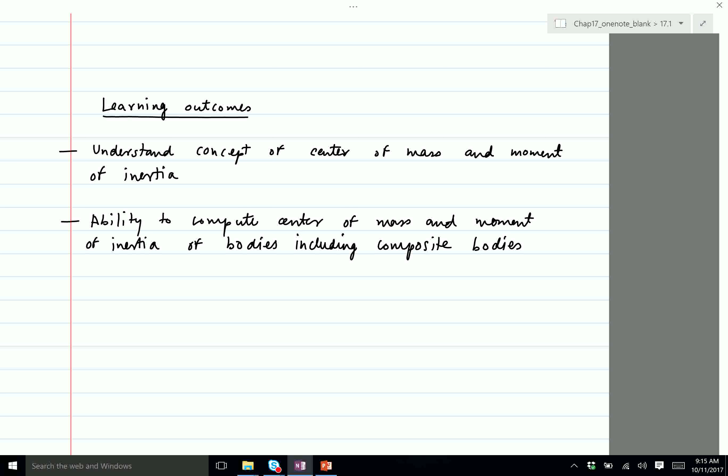This will set you up to do rigid body motion. This is not rigid body motion yet, not the dynamics yet, but just the basics to get to applying F equals ma when things are rotating.

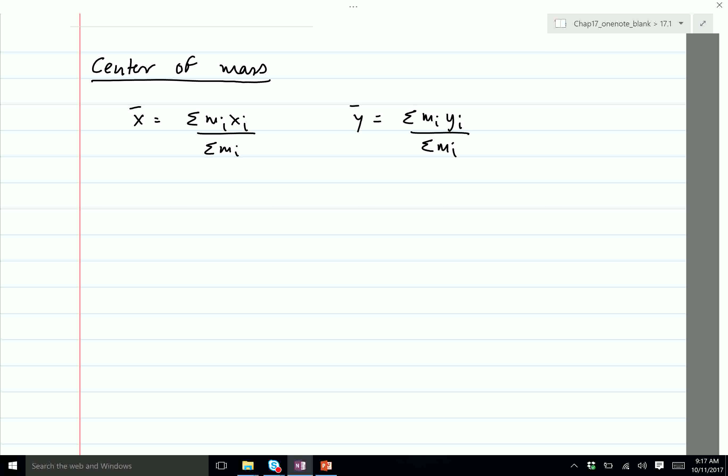So what do I mean by this? Well, this applies to either a simple shape like a circle, which would have a different center of mass than a rectangle, or a sphere, and so on. We'll be giving you pretty much the center of mass of simple shapes. For example, for a circle, it's in the middle, assuming the mass distribution is uniform. For a rectangle, it's again in the middle. What we are interested in here is trying to find the center of mass of composite bodies like such.

So if you're given a geometry which consists of two squares, and I ask you to find the center of mass of the composite bodies, where we know the center of mass of this square is right in the middle, and the center of mass of this one is right in the middle, but where is the center of mass of this composite body? What will help you do that is those formulas.

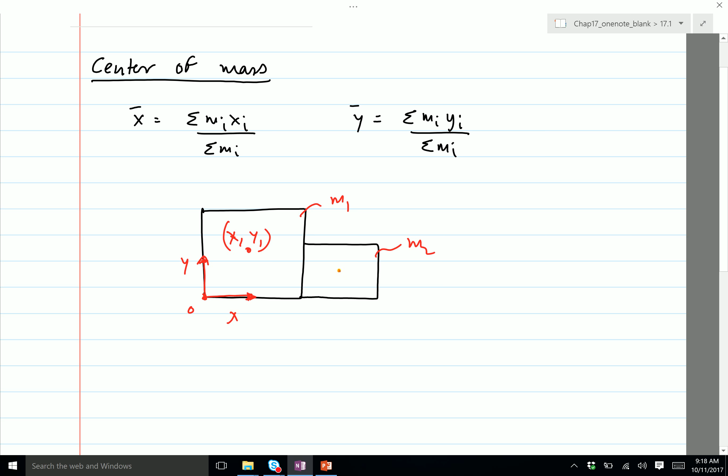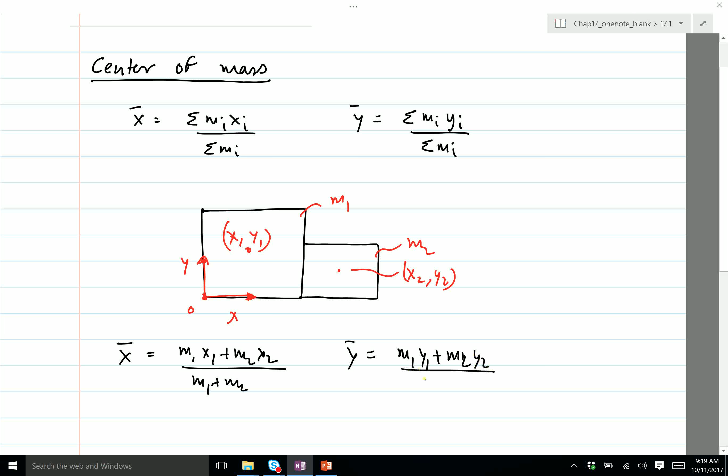So if this is m1, this is m2, this is x1, y1, where x1, y1 is the center of mass defined relative to the origin which I've shown there, and then x2, y2 is this. In order to find the center of mass, you just apply: x bar is equal to m1 x1 plus m2 x2, divided by m1 plus m2, and y bar is m1 y1 plus m2 y2, divided by m1 plus m2.

X1 and y1 is the center of mass. So for example, if I told you that the sides of this square are 1 and 1, then x1 would be half along the x-axis, and y1 would be half along the y-axis. Let me make it clear this way. This is y1, this is x1.

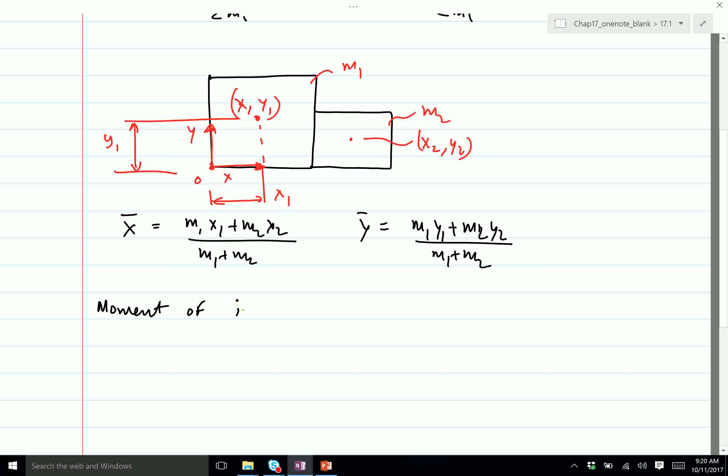Is x2 from the origin, or is it from the center of the second block? Good question. It is from the origin.

This is x2. This is y2.

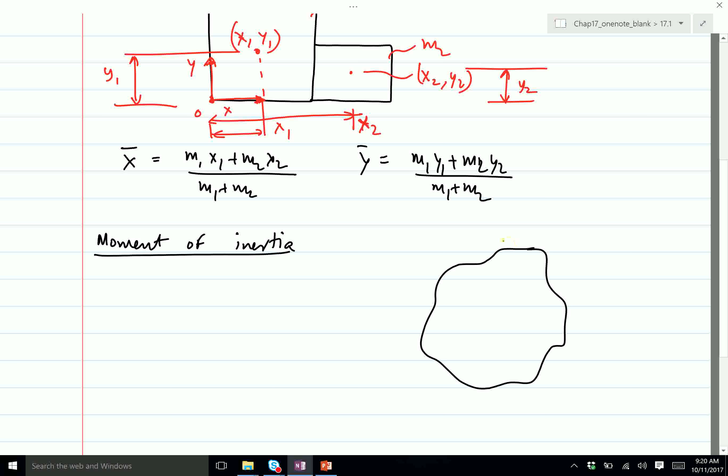So the moment of inertia is something which I believe you've learned how to compute in calculus. What it physically means is, let me just write the formula. If you want to find the inertia of a body, you need to take a small element at a distance r from the axis along which it rotates, or the axis for which you are finding the inertia, multiply by the mass, and take the integral over the mass. I'm not expecting you to do an integral. It boils down to, depending on the body, if it's a plane body, a double integral; if it's a three-dimensional body, a triple integral. Not expecting you to know that.

What inertia physically is, is the tendency of a body to oppose rotary motion. Just like mass is the tendency of a body to resist linear motion, the analogous part in the rotational world is the moment of inertia.

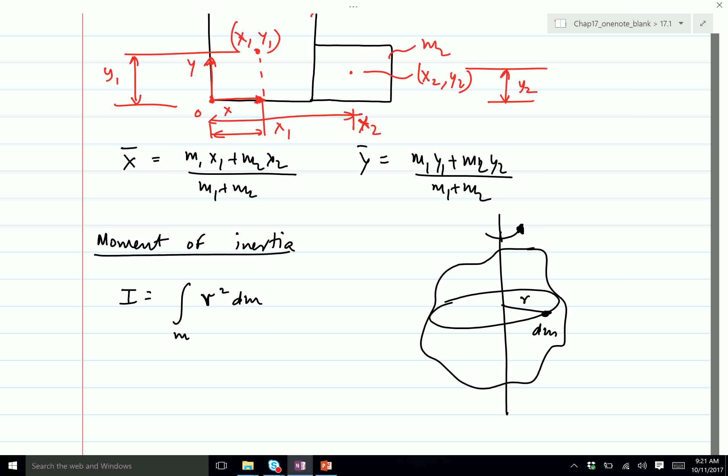So we will be giving you the inertias. We are not expecting you to remember them. A few inertias which are important, which basically come again and again in the class, are the inertia for a cylinder about, by the way, the inertia is defined about an axis. So in this case, for example, there is the axis z, which is along the length of the cylinder, and x and y is along the circle. Most of the time, Iz is half mr square, and Ix, Iy is different.

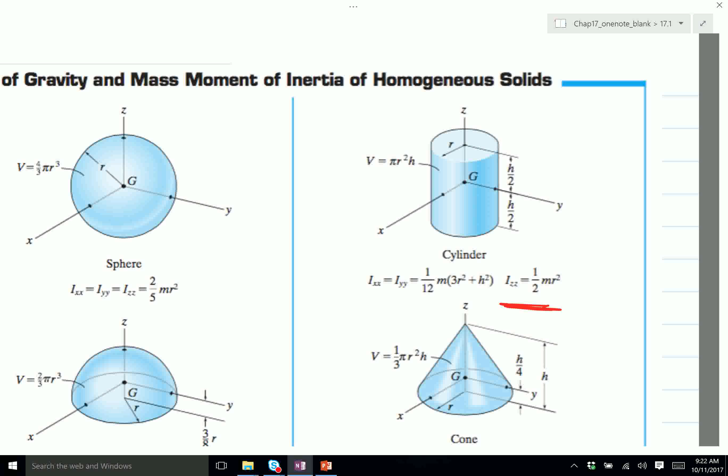So most of the time, we'll be looking at cylinders which roll, which means that we need to find Iz, and that's one formula which we'll be using again and again. The other one which will be coming again and again is this one, and then the ring is important, and then slender rod is important when we talk about pendulums. This is important.

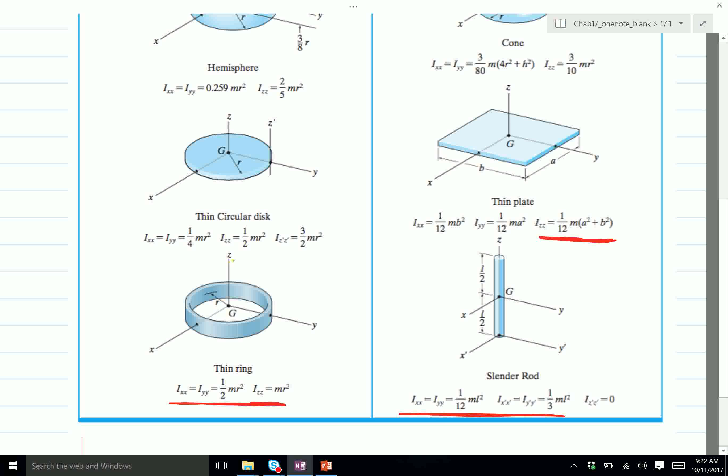I think disc, yeah, sometimes disc is the same as the cylinder. That's important. Nevertheless, you do not have to remember, as I said, we will not give you this table in the formula sheet, but for the specific problem, we will give you the formula, so don't worry about it. At the most, what you might have to do is we might give you Ix, Iy, and Iz, and you might have to figure out which of those inertias you have to use to solve the problem.

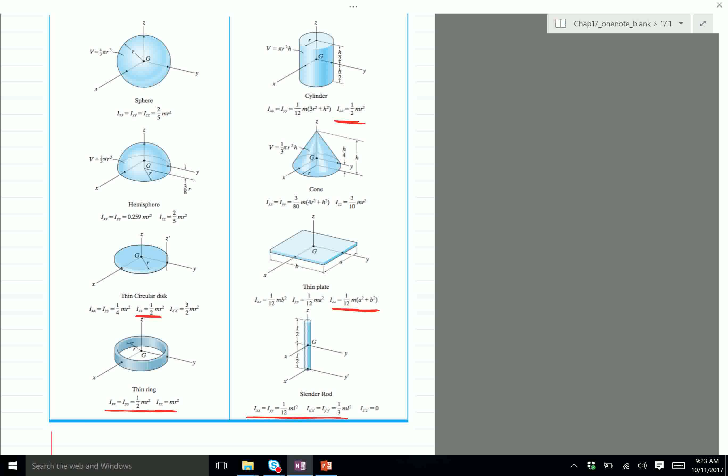Okay, the last thing I want to say before I go to problems is what is known as the parallel axis theorem, and this is two things: parallel axis theorem and radius of gyration. So parallel axis theorem is a way of computing the inertia about a parallel axis, and I'll tell you what I mean by that. Parallel axis theorem.

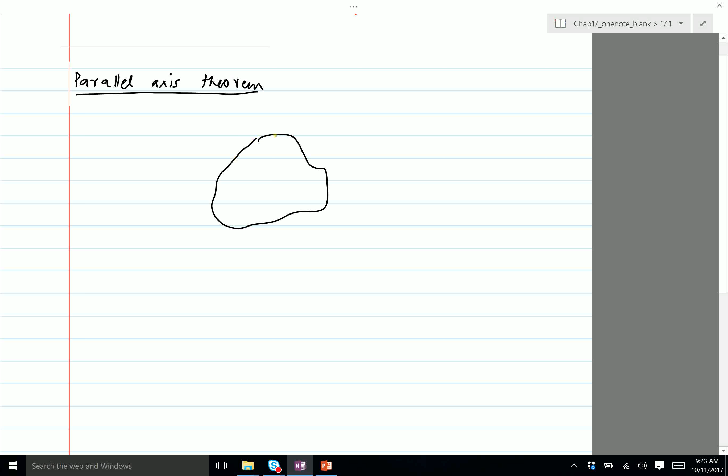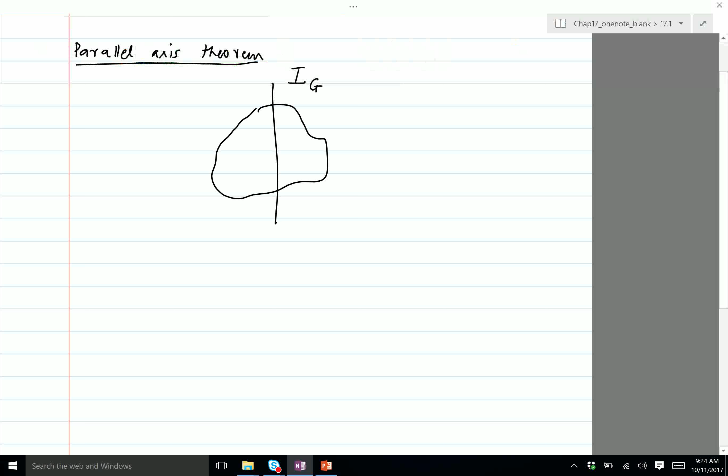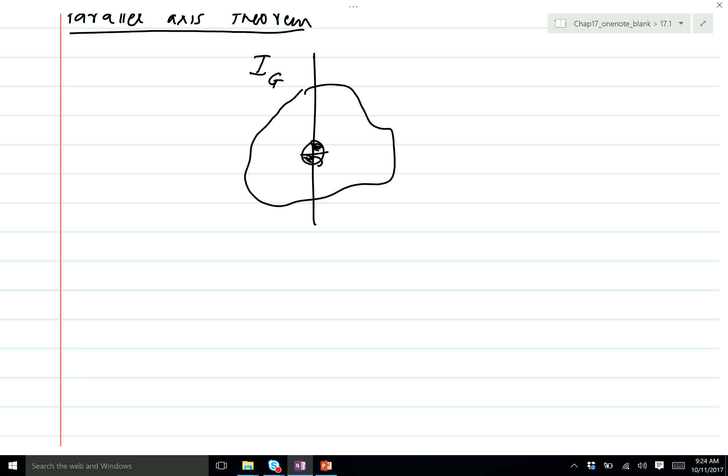So given a rigid body and you know the inertia about the center of mass, center of mass is usually denoted this way. So for example, for a cylinder about Iz, the center of mass is mass times length square, mr square divided by 2.

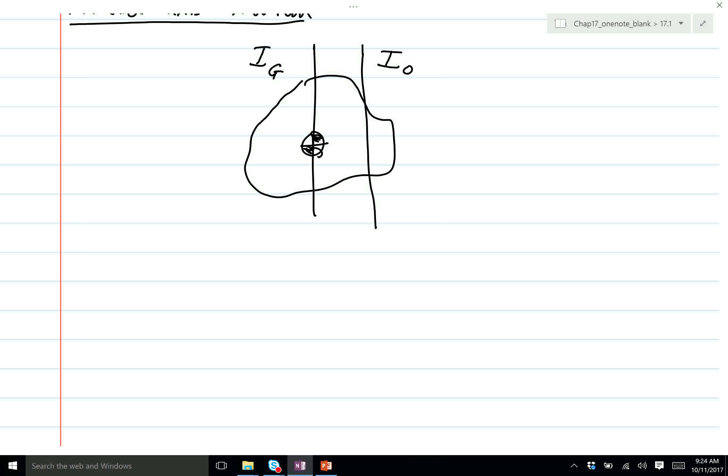You want to know the inertia about a different axis. Let's call that IO. So the table will give you Ig. The question is, how do you find IO? There's a simple formula: IO is Ig plus mass times distance squared. The distance is the distance from the axis which you are trying to find the inertia about, which in this case is the right axis. So that's the d, the distance between the two axes, and you just take the mass of the body and multiply with d squared.

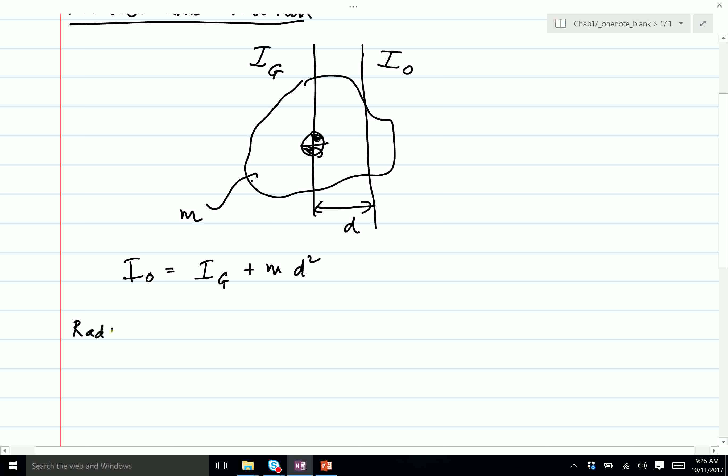So I'll give you Ig from the table, you'll get Ig. You need to find IO. This is how you do it. The last thing before we get to problems is radius of gyration.

So what you're given is, typically in a problem, the radius of gyration is so and so. So if you're given the radius of gyration, you only have to take the mass and multiply with k square, which is the radius of gyration, to get the inertia. You do not have to look at the table. So what is the radius of gyration? It is the, yeah, so I should write k here.

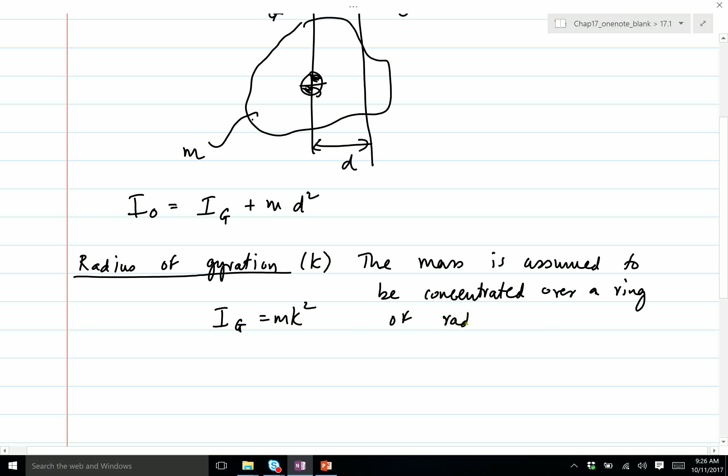The mass is assumed to be concentrated over a ring of radius k. So what it means is, if you're given a random body like this, and it has its own IG, given to you, you try to take a rigid body which has a shape, it could be a funky shape, or it could be a cylinder, whatever you have, and try to think of reducing that figure into a ring of radius k. For calculation purposes, you take this body and reduce it to a ring of radius k. That's the radius of gyration.

It's a way of taking any shape you have and reducing it to a ring of radius k. So how do you get k? Well, you know Ig, it's given to you, it could be from the table or something you compute. Then you just find k equals Ig divided by m, and then you take the square root. This comes from this formula.

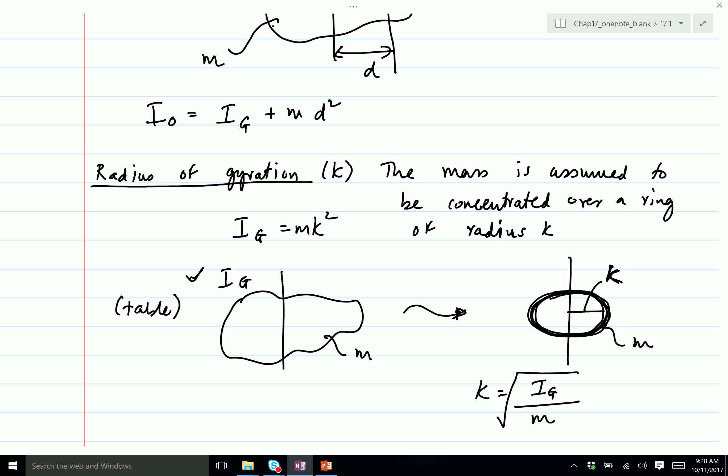So we will not tell you to find k, well, we might tell you to find k. Sometimes we'll give you Ig and you will find k, or we'll give you k and you'll have to find Ig. If it's still not clear, I won't be doing a problem on this, but it will be clear once you solve problems. You'll be given k, you have to find Ig. That's all, it's as simple as that. You do not have to look to any table. So let's get started with problems.

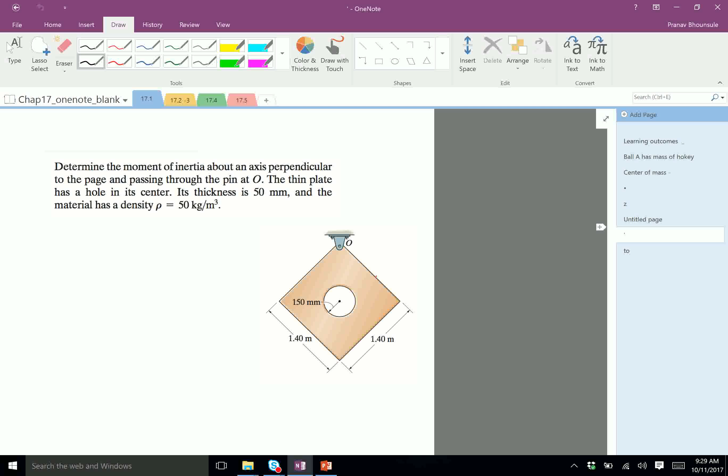It's not an approximation. It is trying to take something which is funky looking or irregular and trying to reduce it to a ring of radius k. So you can take any shape and boil it down to a ring. There's an equivalence between those two. As long as you have the right k, you can think of any shape as consisting of a ring. Every shape is boiled down to a ring. Now the radius of the ring determines the inertia, so you're not changing the inertia, just that you're trying to interpret any shape as a ring of radius k. That's what radius of gyration helps you to do.

Here is a problem on moment of inertia. Determine the moment of inertia about an axis perpendicular to the page and passing through the pin O. The thin plate has a hole in its center, and its thickness is 50 mm. So the thickness is something you cannot see in a top view, but it's basically the thickness of this disc going into the plane of the paper.

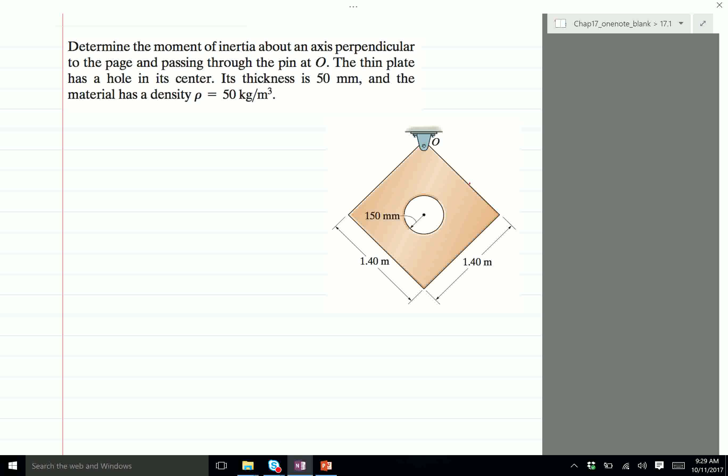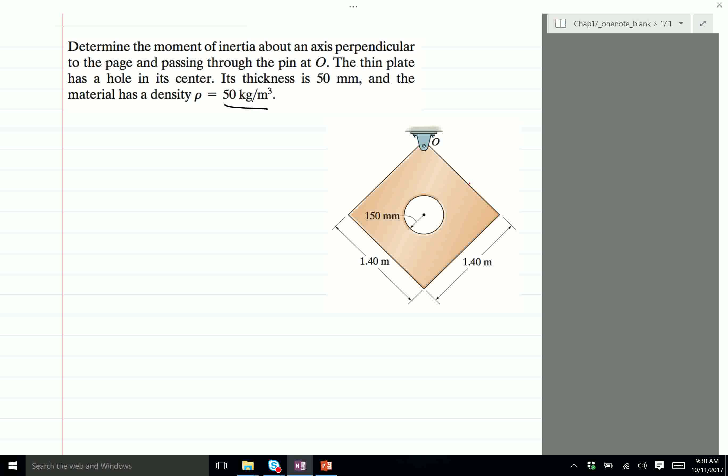The material has a density of 50 kg per meter cubed. You're told to find the inertia about O. O is the pin joint right on top, and the axis is actually coming out of the plane. So think of this as the axis. Is this perpendicular to the page? Yes. This is the page, and that's perpendicular to the page, pointing out.

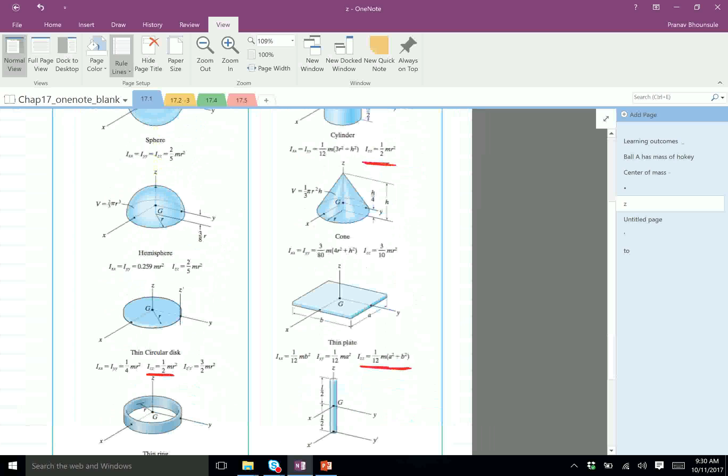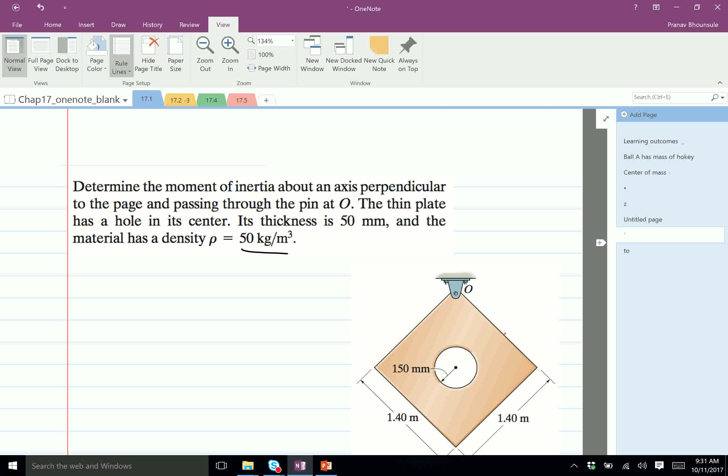However, the issue is that this is not just a square, there's a hole in it. So in this case it's a composite body, and the way you analyze such a system is by breaking it down into two shapes: one shape is the square, another shape is the circle. I find the inertia of the square using the method I just described, I find the inertia of the circle using a similar method, and then subtract the two out, and I'll get what I want. So in pictures, this is how you go about doing this.

So you subtracted the first circle in each? Yes, see if this makes sense. This is what you're interested in, the inertia about O. I'll find the inertia of this shape, which is the square, about O, then I'll find the inertia of the hole about the same point O, and I'll just subtract the two. It's something called superposition — the effect of how you compose the shapes is linear, so you can actually subtract the things out and get the answer. In fact, I think I'll do it two ways.

Yeah, so it's linear, so you can do this. The harder way to do this is use your knowledge in calculus, integration, double integral, and then actually do the triple integral. You'll have to integrate from there to here and go through this system.

Okay, let's try to find the inertia. I'll call this shape 1, I'll call this shape 2. So I'm going to find IO, meaning the inertia about point O, for the composite shape. I'm going to find the inertia about O for shape 1, and the inertia about O for shape 2. As long as I can compute this and this, I found what I'm interested in, which is IO of shape 1 and 2.

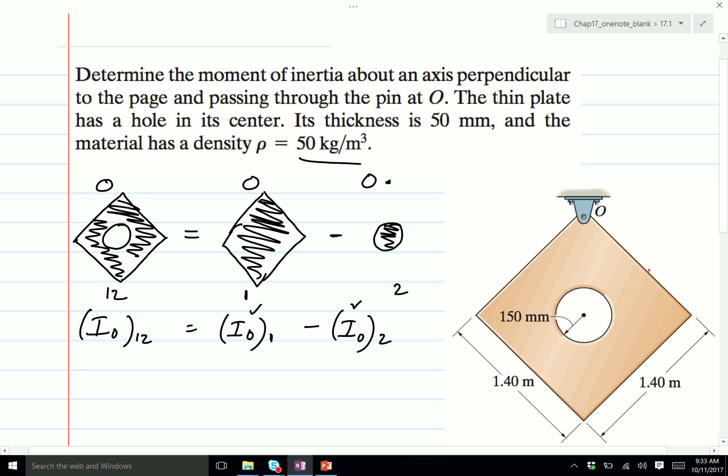So let's try to find IO1. IO1 is the inertia about O, but I do not know the inertia about O because the table will only give me inertia about G, the center of mass. So I need to use the parallel axis theorem: IG plus... I would need to find the distance from O to G, plus mass times distance squared.

So to show this, I need to find this distance. You can see that this distance is half of this distance. So this distance is what? If this is 1.4 and this is 90 degrees and this is 1.4, then this distance is going to be, from Pythagoras theorem, 1.4 squared plus 1.4 squared, the square root of the sum, so it's actually 1.4 square root of 2. So this distance is 0.7 square root of 2, half the diagonal distance. So I'm finding the diagonal of the square and then taking half the distance.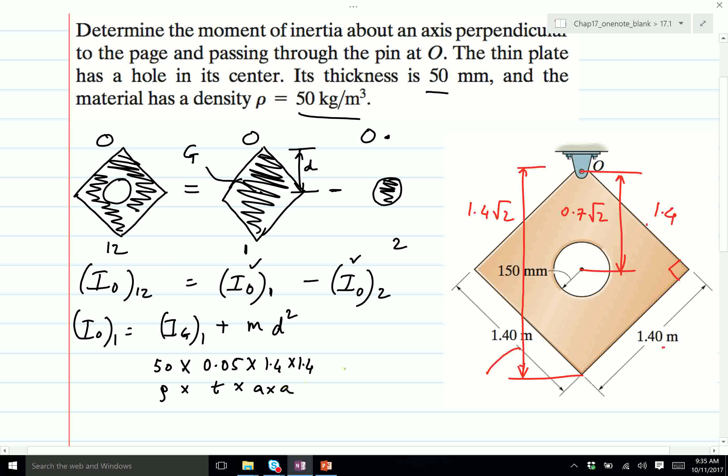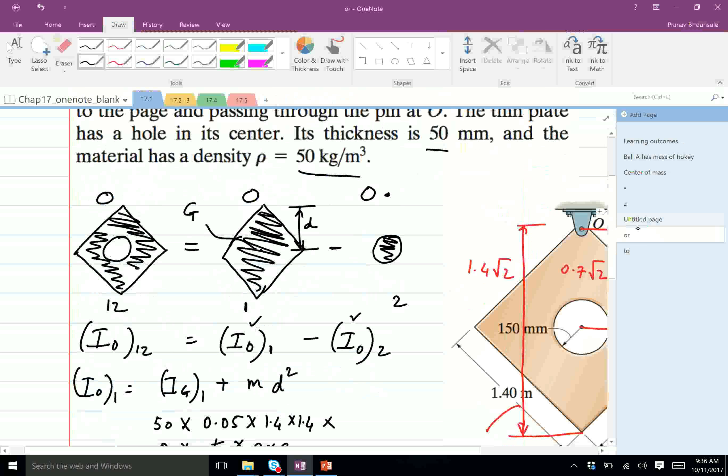So what I have here is IG is 50, the density, times the thickness, which is 0.05, times the length of the sides, 1.4 times 1.4. So density times thickness times A times A times the... I got to go back and see the formula. So the formula is 1/12 m times a squared plus b squared. If I put a equals b, I get m times a squared plus a squared, so that's going to be 1/6 m a squared, right?

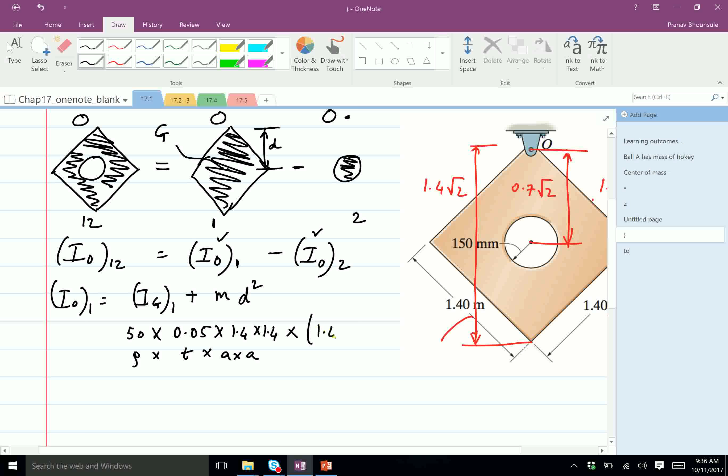So let me go back, and then right here, 1.4 squared divided by 6, plus mass, which is the same thing as here, so 50 times 0.05 times 1.4 times 1.4 times d squared, so d is 0.7 times square root 2, squared. So this comes out to be 6.4.

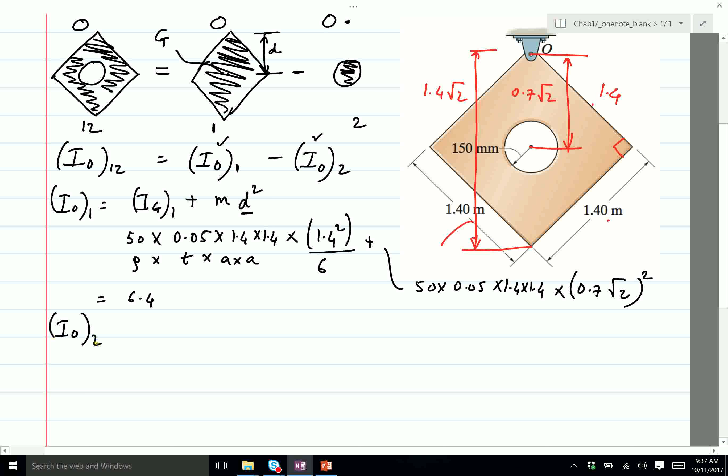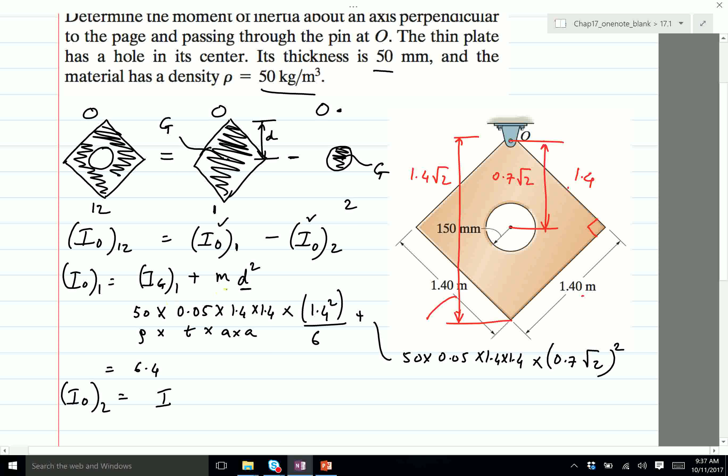Okay, the next thing I need to do is find the inertia of the circle about point O. Again, I do the same thing. I find the inertia of... yeah, good question. So it's in SI units. It has units of mass times distance squared. So mass is in kilograms, the distance is in meters, so it's kilogram meter squared.

So inertia of the circle is Ig of 2 plus mass times... well, I should be careful here. This is mass of the square and this is the mass of the circle times d squared, where d is the same thing, it's the same distance. That's d. So if I want to find the inertia of the circle, I need to find the inertia about the axis which sticks out of the plane, right? Because once I know that inertia about Ig, I can then use the parallel axis theorem. I know Ig and IO, and I know the distance.

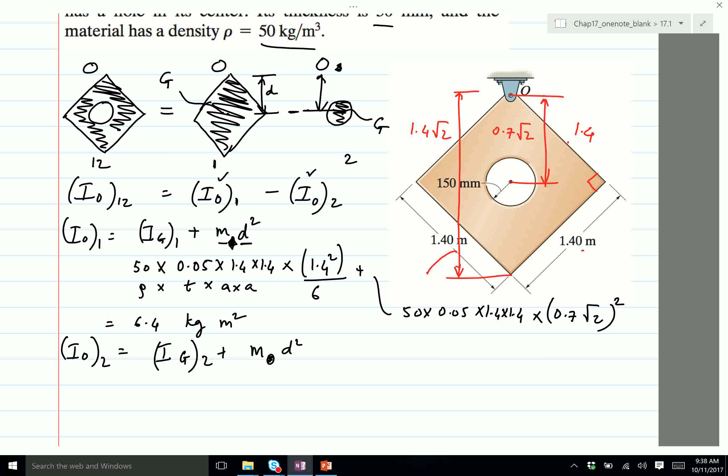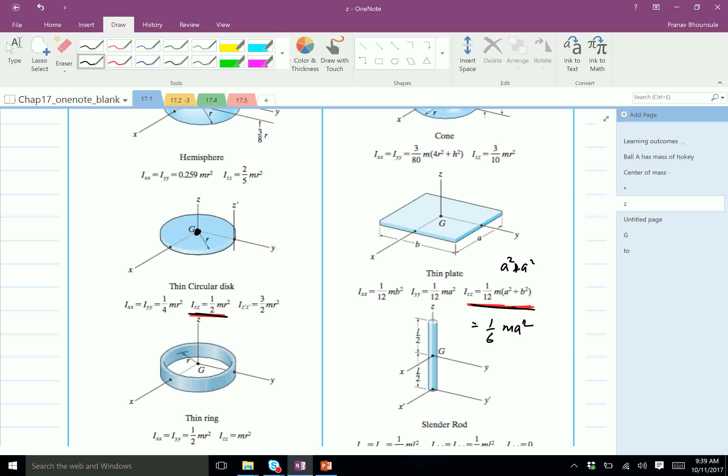So again, I go to the table, try to look for a shape. I think the thin circular disc qualifies, right? So I need to find the inertia about Z. It's half mr squared. It turns out they've actually given you what I'm after. They've also given you I about Z prime. You don't quite need it, but if you wanted it, you can use IG about this axis. So here they're giving you an extension. Anyway, so let's use this: it's half mr squared, the inertia of the circle about an axis which comes out of the plane. So I'm going to use half mr squared.

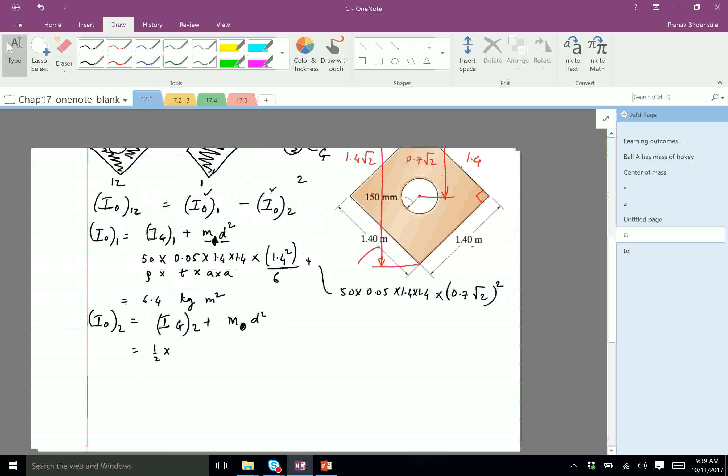Half times mass. Okay, the mass is 50 for the density times the thickness, 0.05, times the area of the circle, which is pi r squared. Pi times r, so radius is 0.15 squared divided by 2. Sorry, I already have the 2, my bad. So this is rho times thickness times area, or pi r squared.

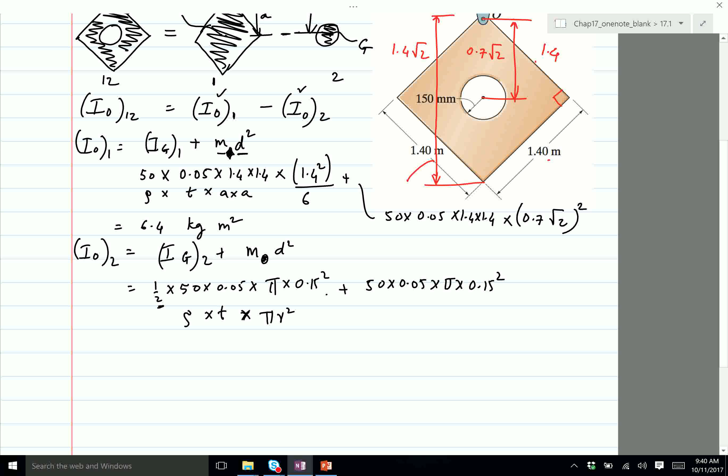Am I forgetting something? I think I am forgetting. Okay, this is half m r square plus m d square. So I'm forgetting, this is just the area, so I need to multiply this with r square, which is 0.15 square.

This is the mass, that's the half, okay, plus the same thing, mass, so 50 times 0.05 times pi times 0.15 square times the distance, 0.7 square root 2 squared. Okay, all that gives me 0.175.

So the net inertia is 6.4 minus 0.175, which is equal to 6.23 kg meter square.

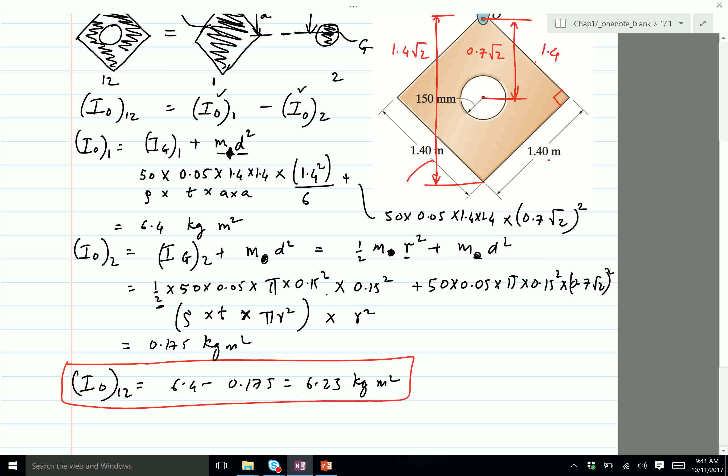So two things, you got to find the center of mass, right? You know the center of mass of the rod, it's in the middle of the rod, and for this thin plate too, but you need to find the center of mass of the composite thing. Once you find the center of mass, you need to find the inertia about G. So I think I have just enough time to finish the first part.

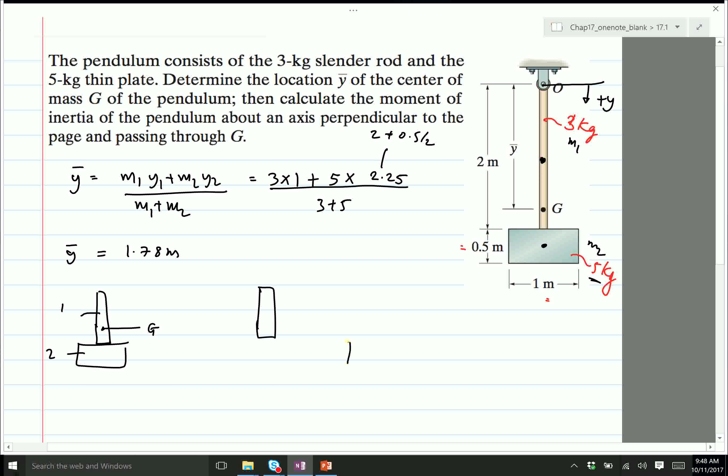So I'm going to draw this in this way so that's much easier to understand. This is 1 and this is 2. This is where G is. So IG12 is equal to... this is where G is. So I need to find IG about 1, where G is this point now, not its center of mass.

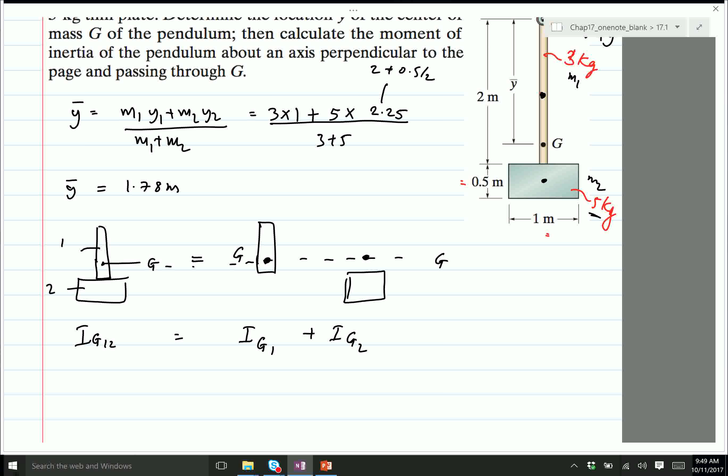G is again the center of mass of the composite section. So as long as I find the inertia of the plate about this point and the inertia of the rod about that point, I can then sum the two to find the inertia of 1, 2. So what I need to do is, in order to find the inertia of G1, okay, that is about this point.

I do not have the value for the inertia about this point. What I do know is the inertia about the center of mass of this particular rod, which is about here. So I find the inertia about the center of mass using the table, then use the parallel axis theorem to find the inertia about this point. That gives me this. For this, I know the inertia about the center of mass from the table I showed you some time back. Then I can find the inertia.